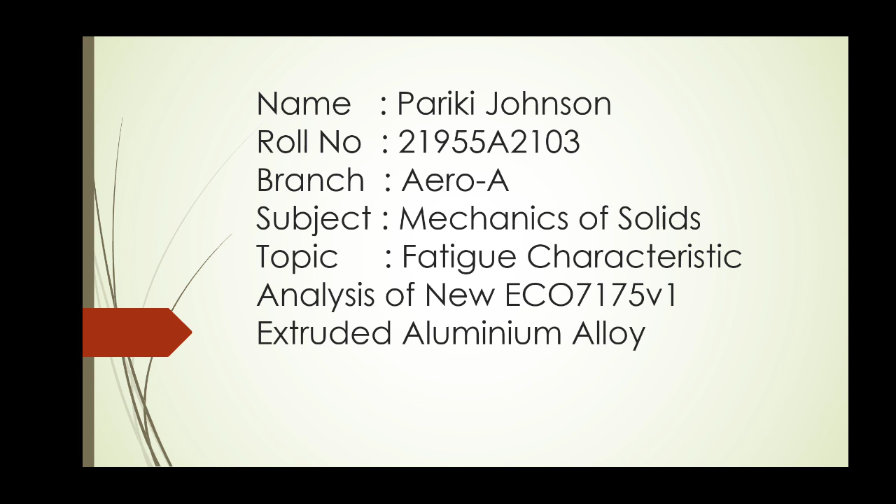My today's Tech Talk subject is Mechanics of Solids and my topic is Fatigue Characteristic Analysis of New ECO 7175V1 Extruded Aluminum Alloy. So we are going to talk about an alloy which is extruded with some different compositions,

and the abstract is: fatigue characteristics of a new extruded aluminum 7175 with an experimental composition where a magnesium calcium alloy is used during the alloying process instead of the standard magnesium is investigated. This new aluminum 7175, dubbed as aluminum ECO 7175V1, results in a cleaner manufacturing process and improves mechanical properties.

The fatigue behavior of the new aluminum ECO 7175V1 with T74 temper is investigated. Sorry, experimental data showed the fatigue life of ECO 7175V1-T74 aluminum can exceed 10^7 cycles with a fatigue strength of approximately 207 megapascals, about 36% of its tensile strength.

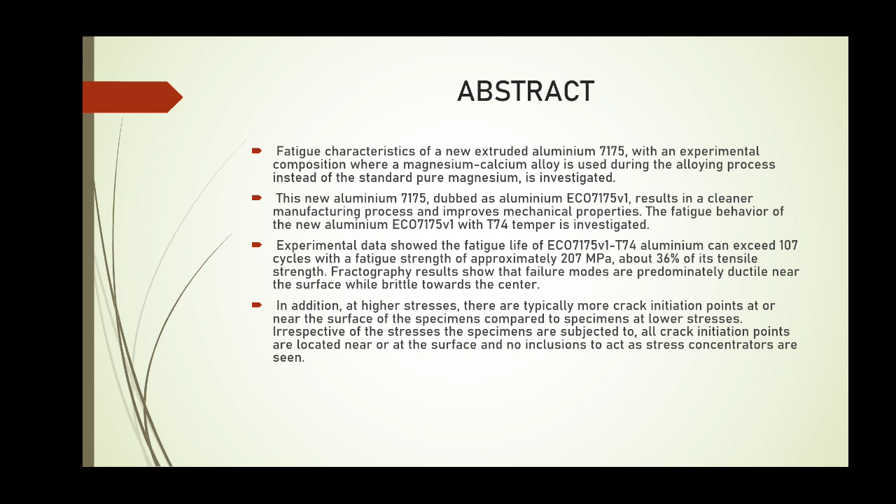Fractography results show that failure modes are predominantly ductile near the surface while brittle towards the center. So this is all about the abstract, and moving forward to the introduction.

Aluminum is an abundant material that is relatively soft, ductile, malleable, and lightweight. Aluminum also has good strength to weight ratio, corrosion resistance and low thermal expansion. As a result, it is widely used in the aerospace industry due to many of its attractive properties. However, the inherent strength of the material leaves more to be desired.

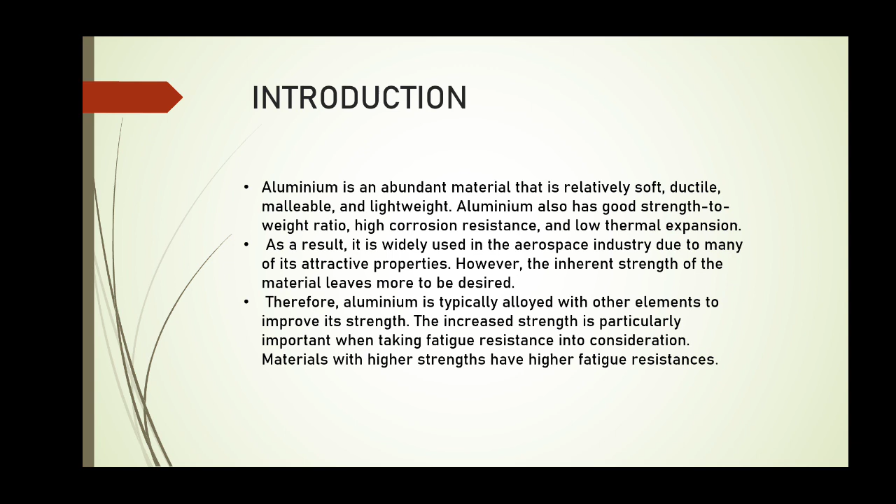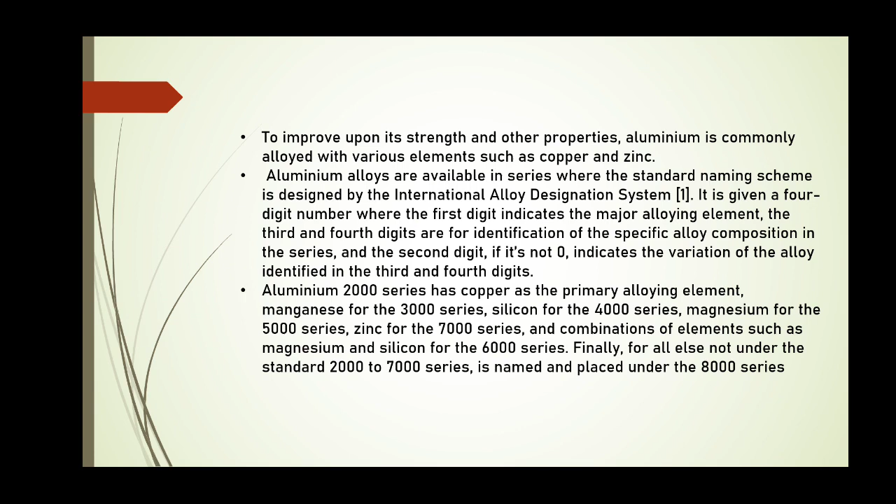Therefore, aluminum is typically alloyed with other elements to improve its strength. The increased strength is particularly important when taking fatigue resistance into consideration. Materials with high strengths have higher fatigue resistances. To improve upon its strength and other properties, aluminum is commonly alloyed with various elements such as copper and zinc. So this is all about the introduction.

Moving forward, manufactured composition of aluminum ECO 7175V1-T74. So let's look at that, the element composition in percentage. The element composition of aluminum is balanced in this special type of aluminum. So let's look at the other compositions.

Calcium with a percentage of 0.041, chromium of 0.21 percent, copper of 1.74 percent, iron of 0.08 percent, magnesium of 2.73 percent, manganese of 0.01 percent, silicon of 0.04 percent, titanium of 0.028 percent, and finally zinc of 5.95 percent. So after the balanced aluminum, zinc is the highest percentage composition in this special aluminum.

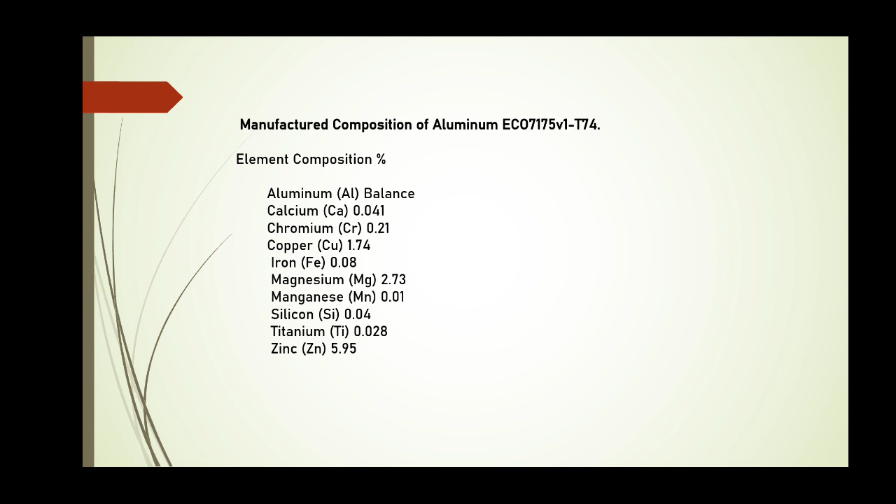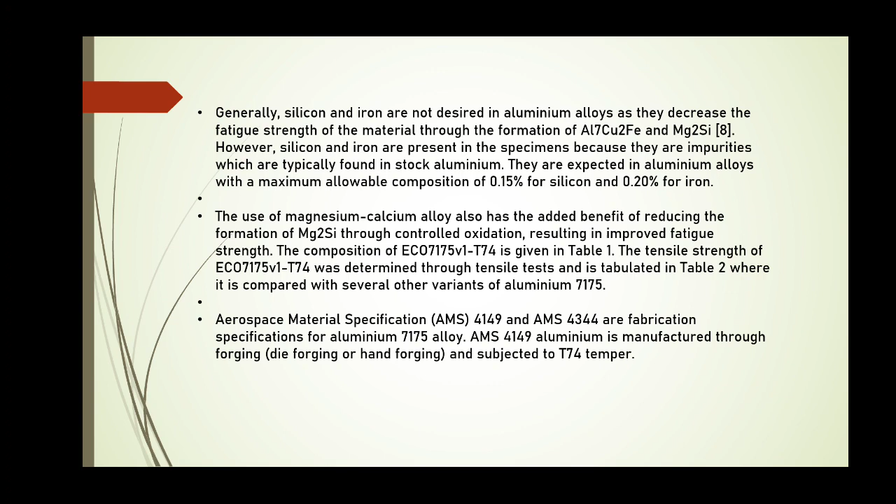So moving forward, generally silicon and iron are not desired in aluminum alloys as they decrease the fatigue strength of the material through the formation of Al7Cu2Fe and Mg2Si. However, silicon and iron are present in the specimens because they are impurities which are typically found in stock aluminum. So there is some information regarding the composition of this special aluminum. So we're moving forward to the next.

Hope you all came to know about the special aluminum and its composition, along with its properties and its usage in the present technology. So the conclusion is ECO 7175V1 extruded aluminum alloy with temper T74 is subjected to a fully reversed bending load and examined to find its mechanical characteristics.

The generated S-N curve shows that the fatigue life of the new fabricated ECO 7175V1-T74 aluminum can exceed 10^7 cycles with a fatigue strength of approximately 207 megapascals or less, about 36% of its tensile strength.